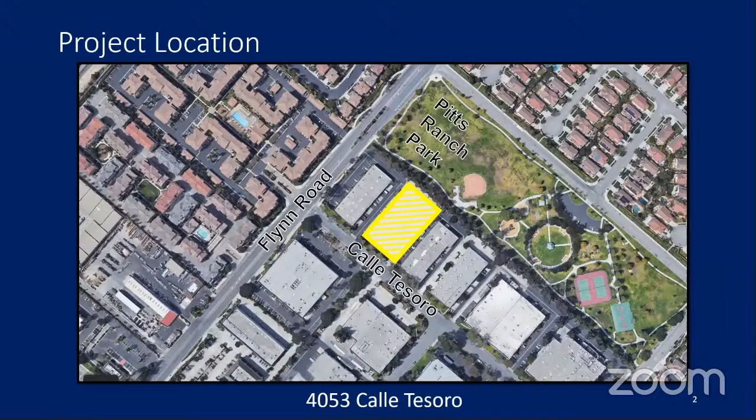The project site is located at 4053 Calle Tesoro, adjacent to Pitts Ranch Park, off of Flynn Road. The request is for approval of a conditional use permit to establish a new stealth wireless communications facility in an industrial portion of the city in the M1 zone. The request also is to increase the allowable height in the M1 zone from 40 feet to 45 feet to accommodate the proposed tower that will be the stealth surrounding for the wireless facility.

Under the municipal code, it's the planning commission that's the decision maker for the requested conditional use permit.

You can see in this image, this is the proposed location of the new wireless facility. Right where that black vehicle is in the front of the screen will be where the tower is connected to the existing building. This tower will take up 3 parking spaces in the corner of the lot.

There are currently 50 parking spaces on site. The tower will take away 3 parking spaces, leaving 47 behind. The existing uses in the building that are going to remain will require 37 parking spaces, leaving a surplus of 10 parking spaces for the site.

Here is the site plan that shows where the tower will be located. There will also be a new landscaping finger created next to the tower.

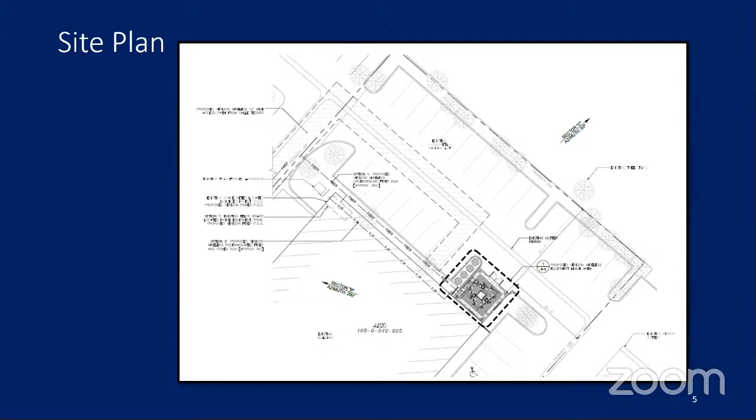Here are some elevations of the proposed tower. It will be using the same colors and materials as the existing building with smooth stucco, precast corrugated concrete. All of the ground mounted equipment will be in the base of the tower, which will be completely enclosed. There is some relief in the height of the tower with an additional roof element. The roof will be Spanish S tile, and there is some decorative venting at the top.

As you can see on the elevations, the top of the antennas are proposed to be at 40 feet, which is the maximum height in the M1 zone. However, there is a proposal to increase the height to 45 feet to accommodate the roof element on top of the tower.

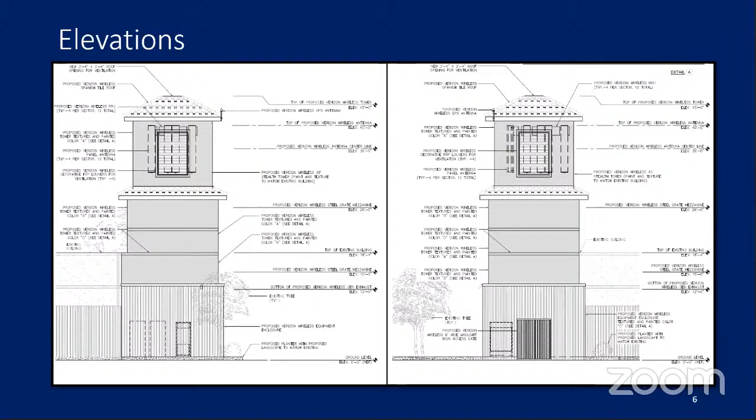Here you can see some photo simulations of what the tower will look like on the building. The picture on the top right is a view from Calle Tesoro, where you'll be seeing the tower most easily from the street at the back of the building.

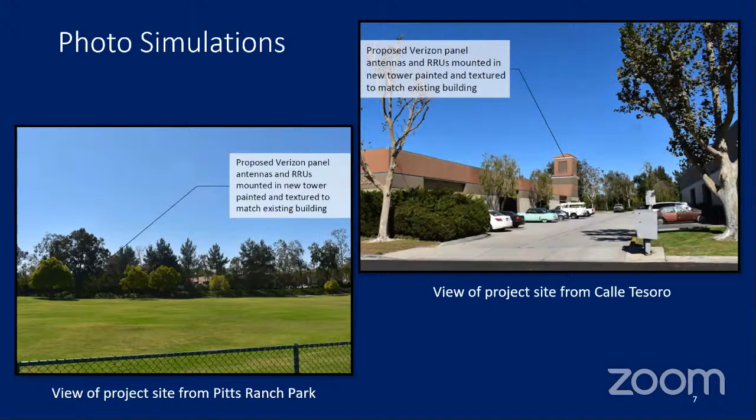The project was reviewed in accordance with CEQA, and it was determined to be a Class 32 infill exemption.

There were some special conditions added to this project. The Municipal Code Chapter 1976 on wireless telecommunications facilities specifies that there are some special conditions to be included on all wireless facility conditional use permits. I'll briefly summarize what those are.

The applicant must submit a radio frequency report for a third-party review within 60 days of commencement of the operations of the facility. All wireless communications facilities must comply with all standards and regulations of the FCC. A site must be maintained in a neat and orderly manner. The facility must comply with the noise ordinance.

The applicant must notify the city within 10 days if their license is revoked. Applicant must remove the facility if it's not in use within 180 days, and the applicant must notify the city if there is a transfer of ownership.

Staff is recommending approval of CUP 387, subject to the conditions of approval. The action of the Planning Commission is final unless an appeal is filed within 10 days of the date of their action. That concludes staff's report. If there's any questions, I'd be happy to answer them.

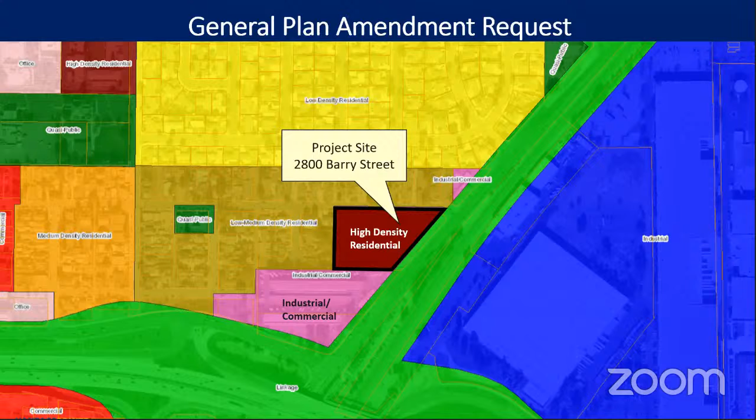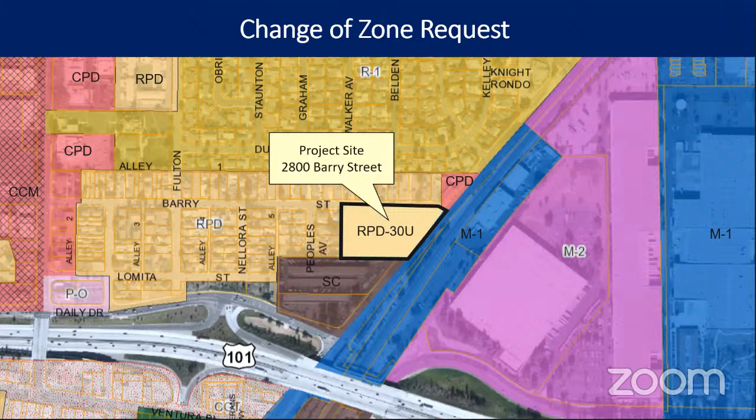The requested general plan amendment and zone change will allow the development of a 68 unit affordable housing development submitted under RPD 205, conditional use permit 405, and tentative tract map 6017.

RPD 205 proposes to construct a 68 unit affordable housing project consisting of 59 affordable rental units restricted to extremely low income, very low income, and low income households, and 1 unrestricted manager's rental unit, and 8 affordable for sale condominium units restricted to low income households.

The development would provide a density of 27 units per acre, which would be consistent with the high density residential general plan land use designation and the proposed RPD 30U zone.

Conditional use permit 405 is a request to provide 7 single room occupancy units, or SROs for short, out of the 60 apartment units within RPD 205.

A single room occupancy unit is a small unit between 300 to 450 square feet with its own kitchen and bathroom, and is rented on a monthly basis or longer.

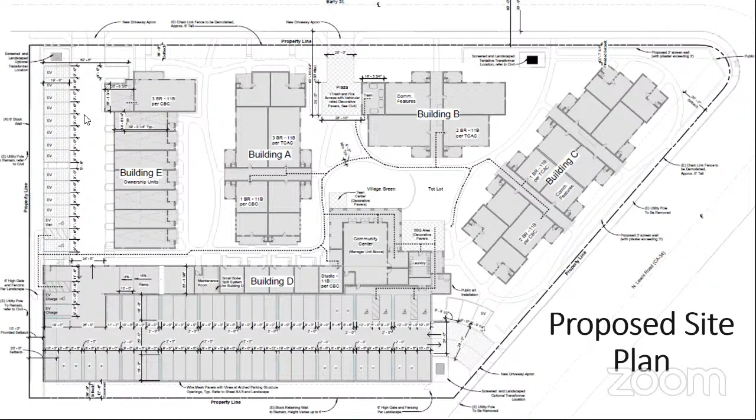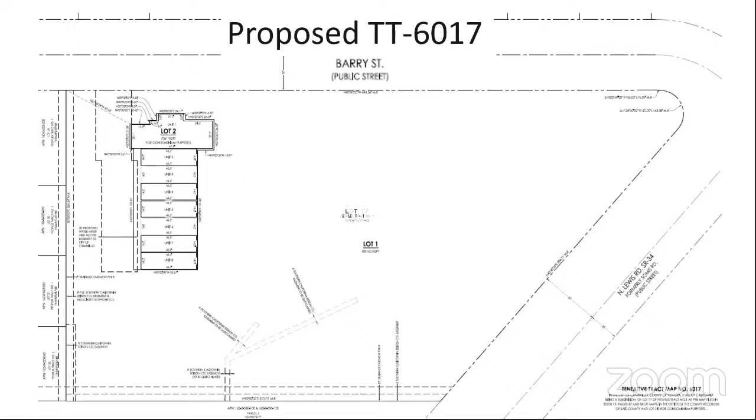The project also proposes 8 for-sale units, all of which will be 3-bedroom units restricted to low-income households.

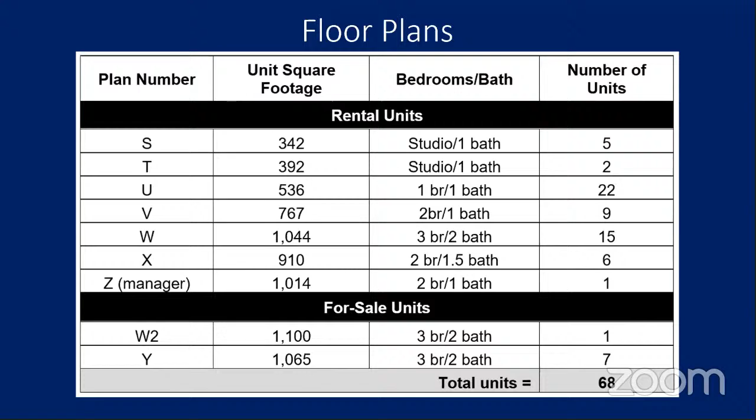The project would also provide 2 different for-sale unit plans. One of those is a 1,100 square foot single story accessible unit, and then the remaining 7 for-sale units are 1,065 square feet to 2.5-story townhome units.

Based on the city's requirements, a minimum of 149 parking spaces are required, and the project is proposing to provide 151 spaces. Each of the for-sale units will have its own 2-car garage attached to the unit.

All of the proposed buildings have been designed in a Spanish colonial style of architecture, consistent with the community design element and heritage zone design guidelines. The building design incorporates architectural elements such as stucco finish, concrete S-tile roof, decorative metal accents, cornices, corbels, tile awnings, and recessed windows. The main body of the residential buildings will be white in color with dark brown trim and black metal accents. The maximum building height allowed in the RPD zone is 25 feet, unless a greater height is approved under the RPD permit.

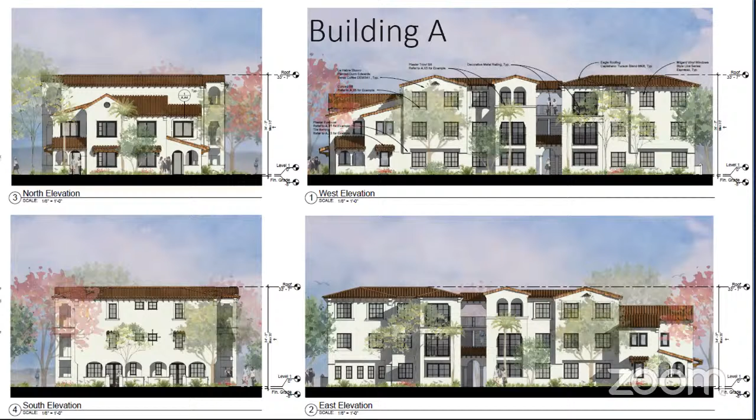Building B is an apartment building, and that also will have a transition from 2-story massing along Barry Street to 3 stories further away from the street. The north elevation, which is on the top left, shows the facade that would be facing Barry Street.

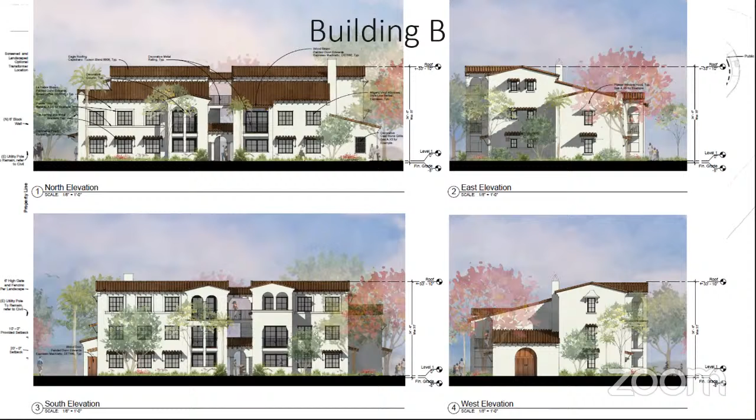Next is Building C, which is at the corner of Barry and Lewis. Building C goes up to 3 stories in the middle and then drops down to 2 stories at both ends. Also, to break up the massing, the building has openings at the stairwells, which allows for access to light and ventilation.

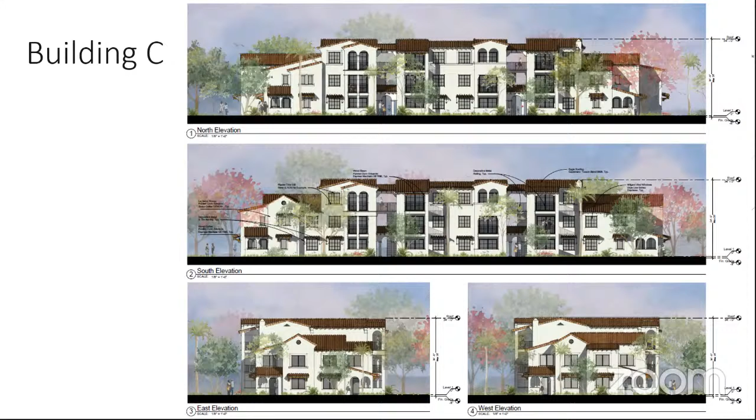Building D, which is located along the southerly edge of the property, includes 5 of the studio units, a manager's unit, laundry room, and community center attached to a 2-level parking structure. The top of the parking structure is approximately 12 foot 4 inches tall and will have solar canopies on top of the 2nd level. The building is highlighted by a tower feature and will include an art feature on the stairwell on the east elevation.

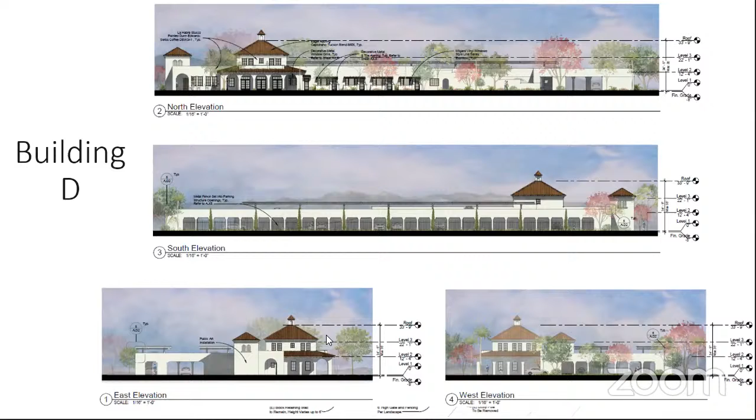The for-sale units in Building E, which is on the westerly side of the property, provide a 1-story unit at the end of the building on the north elevation facing Barry Street, and then transition to a 2.5-story building for the remaining 7 townhomes. The 7 townhomes have tandem garages on the ground floor, living area on the 2nd floor, and habitable attic space on the 1/2-story above.

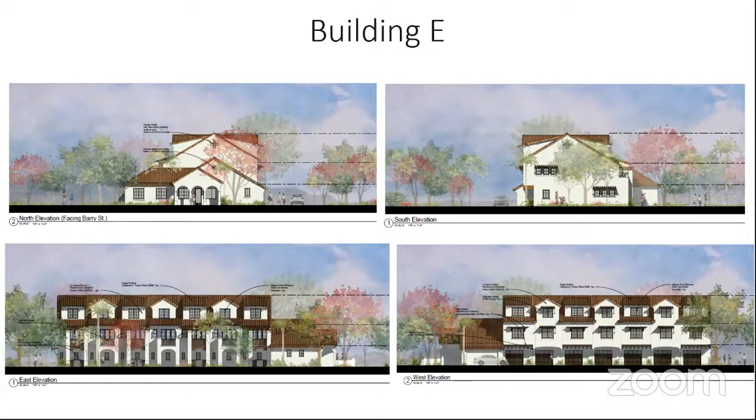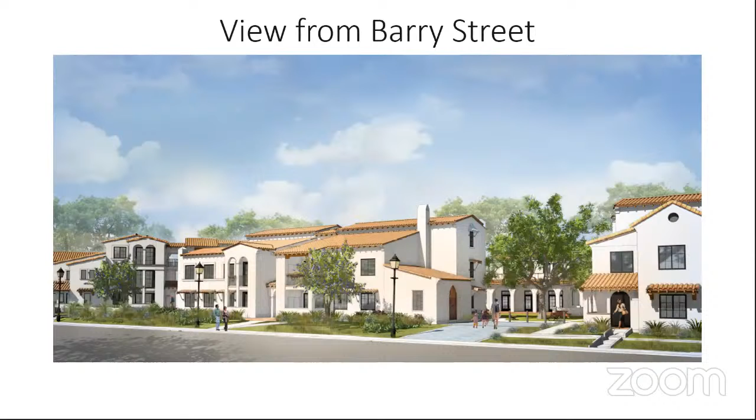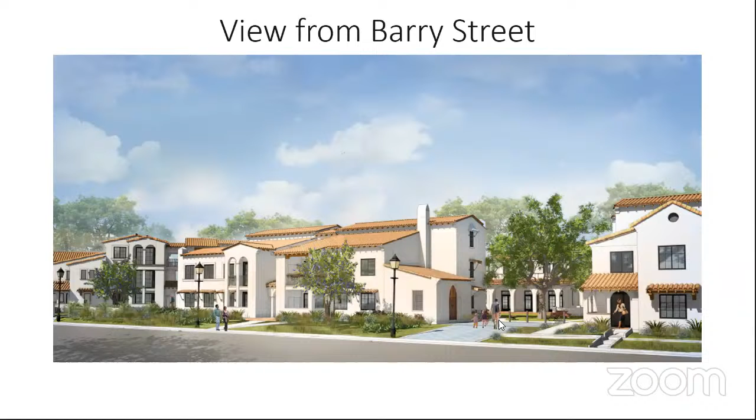This is the view from Barry Street, which shows the massing facing the street is at 2 stories, then goes up to 3 stories within the interior of the project. This also shows the plaza area that will also serve as trash and fire access.

In accordance with the state density bonus law and municipal code chapter 19.49, the applicant is requesting concessions to allow for compact parking spaces in the parking structure and tandem compact parking spaces within the private garages for the for-sale units. They're also asking for a reduction in the required common open space from 48,875 square feet to approximately 30,538 square feet, and a reduction in the rear yard setback from 20 feet to 10 feet from the parking structure to the westerly property line. The project complies with all other development standards.

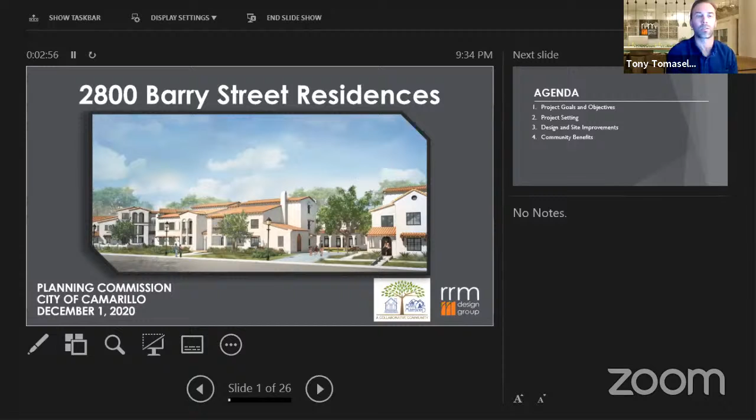First, as we get started, I'll touch on some project goals and objectives that we set forth as we were approaching this project, discuss the project setting and context, go through the design and site improvements in a bit more detail and highlight a few things that I think are important to consider, as well as talk about some of the community benefits.

In terms of project goals and objectives, really our primary goal for this project was to create new, really high quality, affordable housing opportunities and a really wide and diverse mix of housing types for people with varying housing needs.

We really wanted to activate what we see as a bit of a blighted or underutilized lot in a very prominent location in the city, improve pedestrian connections in the neighborhood, implement really cutting edge green building, innovative green building strategies, including solar and other energy and water conservation features, which I'll touch on a little bit more.

Achieve the goals of the city's general plan and the city's vision for this site. They've been a really active partner in this, as you know, through the purchase of the site. And ultimately to create a really valuable and thriving community asset that we can all be proud of at the end of the day.

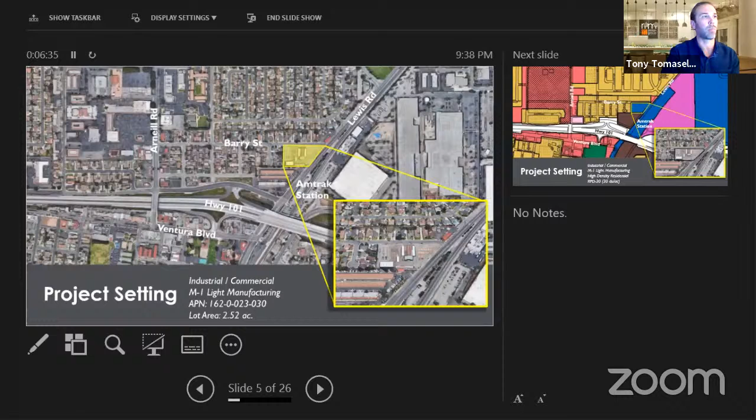It's there at the corner of Barry Street and Lewis Road, as you know, catty corner to the Amtrak station, close proximity to Old Town Camarillo along Ventura Boulevard, as well as the commercial uses along Arneill Road. The site is about a 2.5 acre site, and it's currently zoned for light manufacturing. And it was the previous stock lumber yard location.

This is the zoning map. As you can see, we are requesting the general plan amendment to high density residential and the change of zone to RPD 30, which is consistent with the city's goals within the RFP for the site.

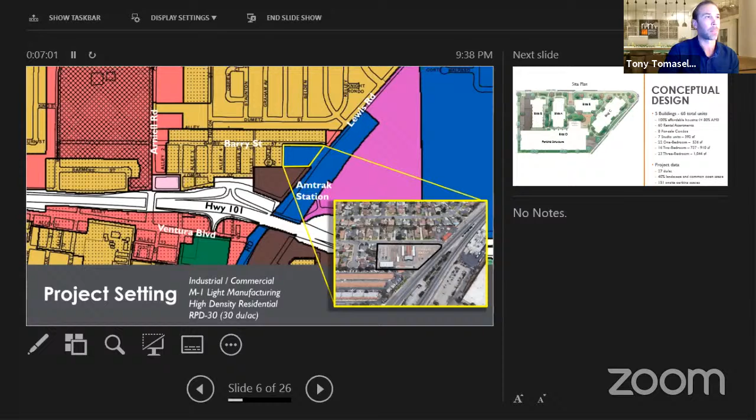And then as we dive into the site plan, one of the things that was really important to us as we started to approach the design is that Barry Street is a residential neighborhood. And so we really wanted to have a really compatible and consistent residential street frontage. So as you'll see in our elevations, each of those buildings that faces Barry Street sort of steps down to either a 1 or a 2-story building massing, just to kind of keep a similar rhythm of development as you would go down the street.

Another thing that was really important is we wanted to create a lot of outdoor space. This project has 40% landscape and common open space by site area, and I'll talk about a little bit more of the common open space amenities in just a moment.

But in order to create that really pleasant pedestrian experience as you're walking, not only through this project, but also on the surrounding streets, is to consolidate that parking into a parking structure along the south side of the site, which is adjacent to the mini storage. And so that was kind of our overarching approach for how we tackled the site design.

In terms of the program, it's again 100% affordable housing for households earning less than 80% of the area median income. There's 60 rental apartments within buildings A, B, C, and D, and 8 for-sale condos, which is within building E.

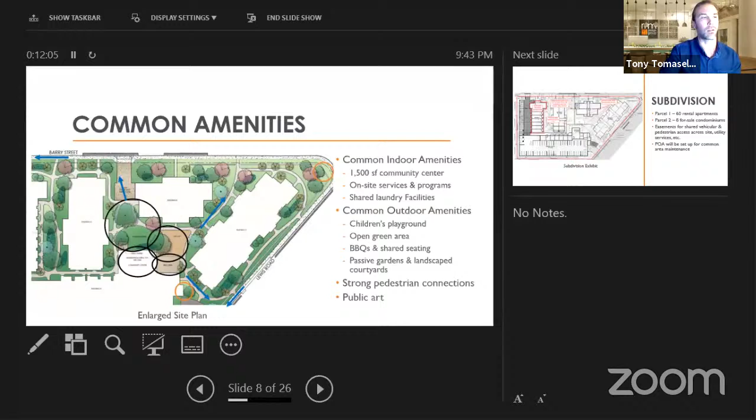And then lastly, because this is a really great gateway site and a prominent location, we wanted to include areas for public art that can announce it and create a really great asset for the community. Those haven't been designed yet, but as we get further into the process, we will likely be working with the city, resident services, and potentially tenants, creating public art pieces that incorporate the tenants, maybe the kids of the area, that can all contribute to those pieces.

We do include a subdivision, and I wanted to clarify why that's necessary. It's a bit of a formality for us, but essentially in order to provide the for-sale condominiums, those needed to be on a separate parcel, so that parcel can individually be condominiumized through the State Department of Real Estate. They'll also finance separately, which was a consideration for the affordable rental housing, which will be on lot 1, which is everything except building E. That will obtain state and local grants, tax credit financing, and the like.

We will be providing easements for shared vehicular and pedestrian access across the site, utility services, etc. And then a property owners association will be set up so that all the common area will be managed by the property manager or the property owners association. There'll be agreements to ensure that occurs.

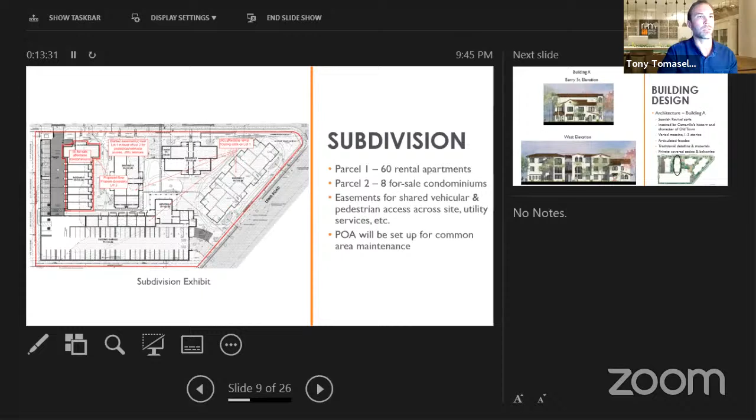In terms of the building design, as Jackie had mentioned earlier, I think it's important to recap. The buildings will be Spanish revival or colonial style, really inspired by Camarillo's history and the character of Old Town, and consistent with the Heritage Zone design requirements. We really wanted to focus on providing a real variety of massing between 1- and 3-story elements, so we can articulate these facades and provide a lot of traditional detailing and materials. All of the units have private covered patios and balconies, which also adds a lot of nuance and interest to the massing of the buildings, so they don't look all the same or all boxy.

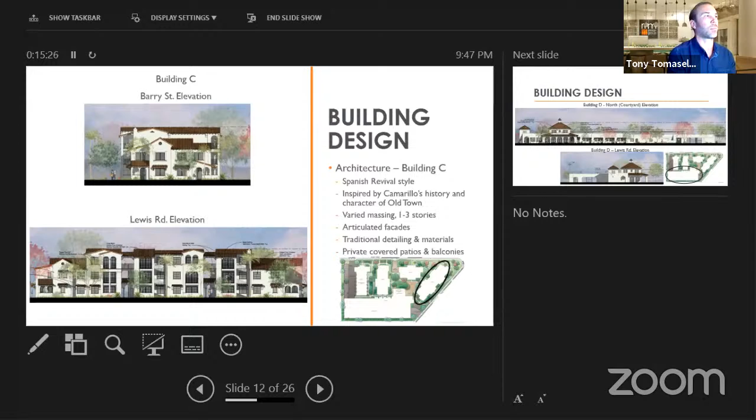Similarly with building C, this is a kind of a unique building in that its access is on a diagonal, reaching out toward that intersection of Barry Street and Lewis. Again, dropping down to 2 stories on both ends.

Building D is the parking structure building, and it's also the building where we'll have the indoor community center and the manager's unit, which would be right above. Because it sort of is the centerpiece for this more active communal open space in the center of the site, we saw this as a real nice focal point to anchor the entire project, especially the more communal aspects of it.

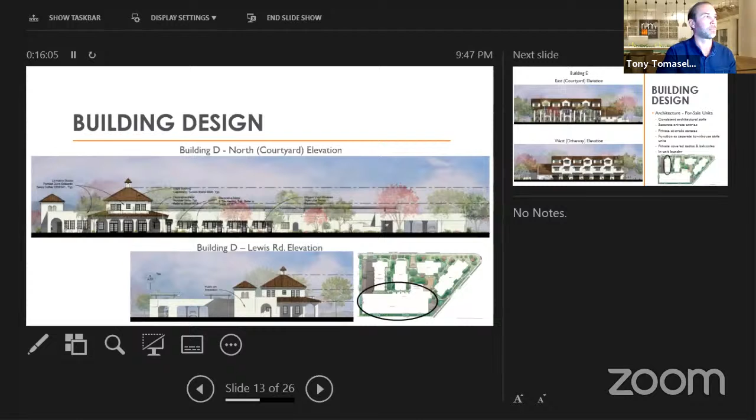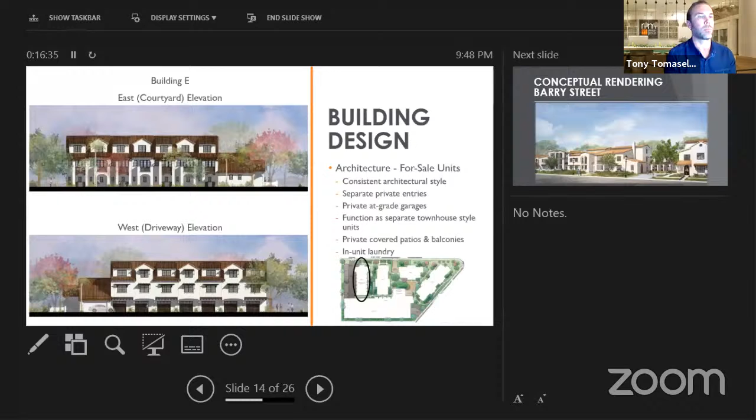And then lastly, building E, the for-sale units. Again, it's a very consistent architectural style, though it has kind of a look and feel unto its own. Each of these units will have a private separate entry, private at-grade garages. These will function as separate townhomes, although they are condominiums. Each will have private covered patios and balconies, as well as in-unit laundry.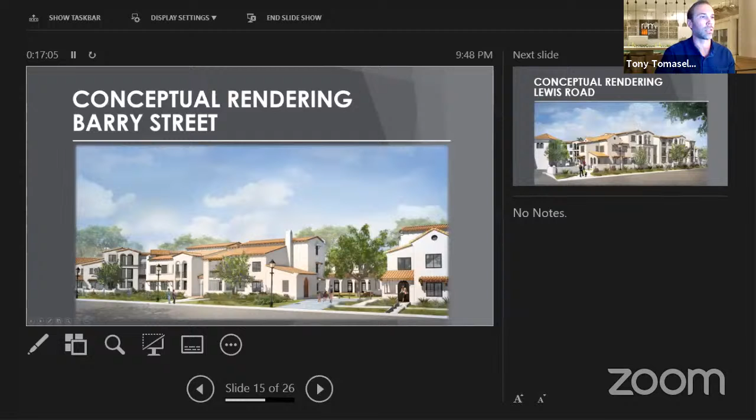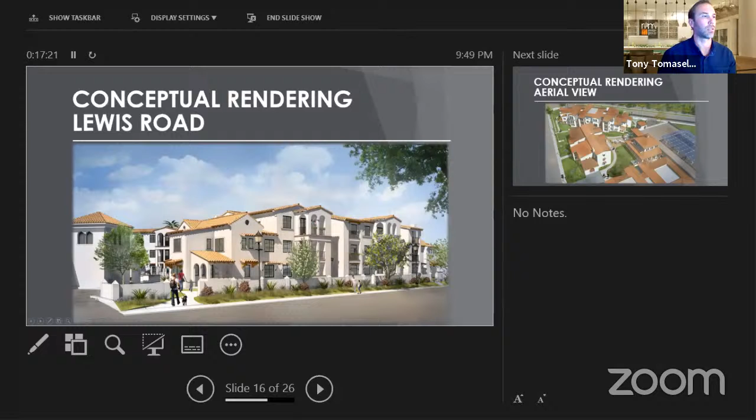And then sort of that large, more heritage tree there in the center. This is the view of Lewis Road, where you can see that driveway entry into the parking structure, as well as the public improvements along Lewis Road, the sidewalk parkway.

And then an aerial view where you can start to get a sense of how the buildings come together, integrate, and how these interstitial spaces might look and feel as well.

There was a question about the solar panels here. Basically, we have not done all of the engineering on these yet, and it can vary. We will be bringing in a photovoltaic consultant to help with the design and engineering of that system. But based on the square footage that we've allowed for, we anticipate that basically all of the electricity for the common areas would be provided for, and then some. We don't know where that exactly lies, but that's something we'll be looking at as we continue forward.

There was also a question about security in the parking structure. One thing that Many Mansions and the Housing Authority typically do on their projects, and I believe it's also a condition of approval, is to provide some security cameras throughout the site, and the parking structure would certainly be an area that we would include some of those as well.

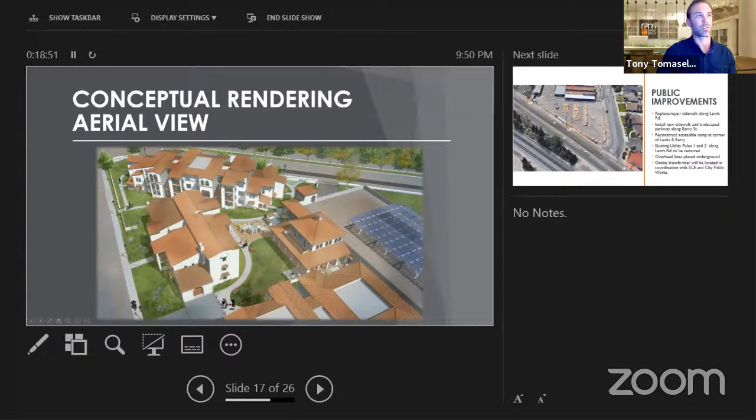There were a few questions about public improvements and undergrounding, which I wanted to take a few minutes and provide some clarification on. So these, again, are the public improvements along Lewis Road. We'll be repairing the sidewalk there, installing a new sidewalk where one doesn't currently exist, as well as the landscape parkway on Barry Street, and reconstructing the accessible ramp at the corner of Lewis and Barry Street.

And then the undergrounding along Lewis Road — essentially what we understand, or what we're anticipating, is that we will take it underground from this pole along this Lewis Road stretch, thereby removing the overhead wires and poles from that frontage. That will be done in coordination with SoCal Edison, as well as the placement of our ultimate on-site transformer.

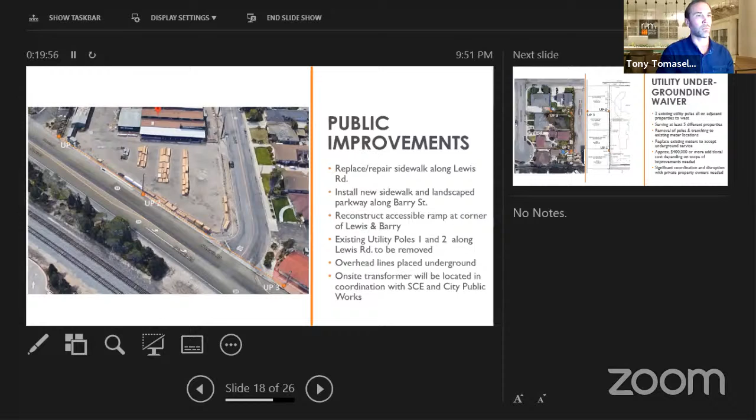Regarding the utility undergrounding waiver that we are requesting, it did come up, and I think the question was answered, but just to clarify again: there are 3 existing utility poles on the adjacent property to the west of ours. As you can see here, I've highlighted the property line, and these poles are just immediately adjacent to that on the adjacent properties.

These poles serve what we understand is at least 5 properties, and undergrounding those poles and overhead wires would require removal of the poles, trenching for the overhead lines, and also trenching through these private properties to the existing meter locations, then replacing those meters to accept underground service. Just the scale and magnitude of doing that, and also coordinating with those property owners, would we believe be a logistical challenge, if not infeasible, and would add significant cost and time that wasn't anticipated and isn't really needed to accommodate this project.

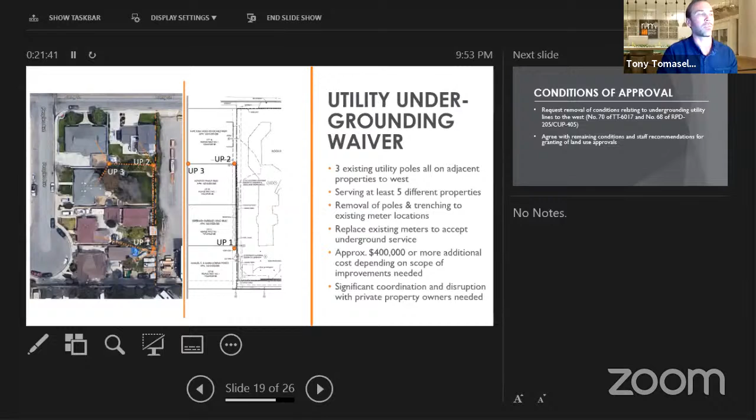Other than that, we agree with the remaining conditions and the staff recommendations for the granting of the land use approvals. And we are very excited about this project. Me personally, I'm born and raised in Camarillo, and this project is close to me, and I'm excited to be a part of the team on this.

I do believe it improves a vacant lot in a prominent location along Lewis Road. There's a strong, diverse mix of new affordable and high quality housing opportunities as part of this project. It's consistent with the city's general plan and the city's vision and affordable housing goals for the site. The design is compatible and sensitive to the adjacent neighborhood and uses. And this development team is a very well-known local partnership with an amazing track record of providing great affordable housing projects in our community.

So with that, I hope I got to all your questions. I'm sure there are still a few lingering out there. If there's anything else I can help answer, please feel free to ask. Thank you again.

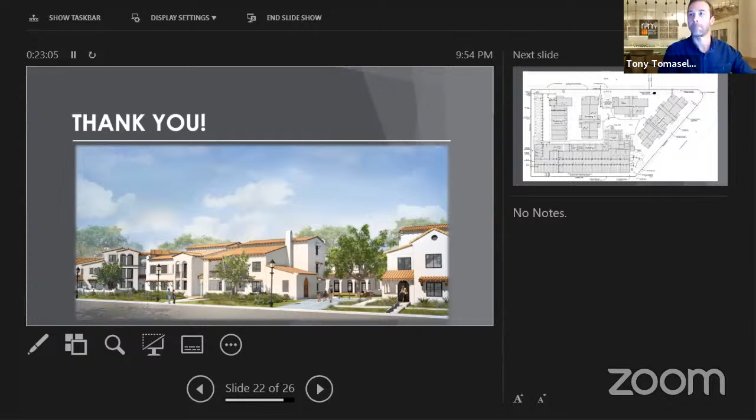Thank you, Mr. Tomasello. This is Joe Vacca. I just wanted to share, I think there was a question. Did you cover the fact that they're walk-up buildings without elevators? These are non-elevated buildings with the exception of the parking structure.

However, as part of the tax credit funding requirements, as well as the goals and desires of the development team, essentially all of the ground floor units throughout the project will be accessible or adaptable, as they call it.

Thank you. And can you speak for a moment about the height? I know the front setback off of Lewis Road is fairly significant, treated like a well-landscaped buffer area adjacent to Lewis Road. And the wall heights out there, I think, are more traditional for what we've experienced at Village at the Park, for example, with about a 3.5 foot tall wall.

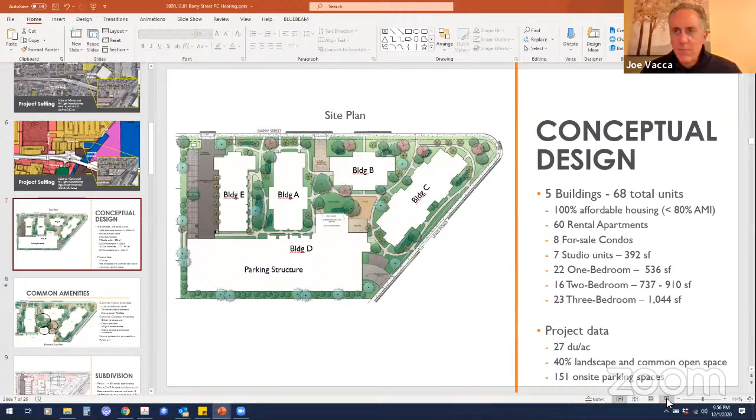But can you talk about that a moment? Yeah, that's right. The goal for Lewis Road was to create a more pleasant pedestrian experience. Although it's a more trafficked road at this point, we anticipate there would eventually be some connections, maybe underneath the overpass and elsewhere as it continued on. So in our opinion, as architects and planners, we think it would be a shame for there to be a higher wall that would really separate this project, or any project, from that streetscape.

In terms of noise and some of those nuisances, as was stated previously, the city does have requirements for noise attenuation. We'll be obtaining an acoustical study that'll give us recommendations. Typically what we see is that not only do the walls of the building significantly attenuate sound, but if any additional attenuation is needed to meet those requirements, you'd go to a dual glaze window, or even triple glaze in certain cases. But from our understanding of the noise levels out there, we don't anticipate that would necessarily be required.

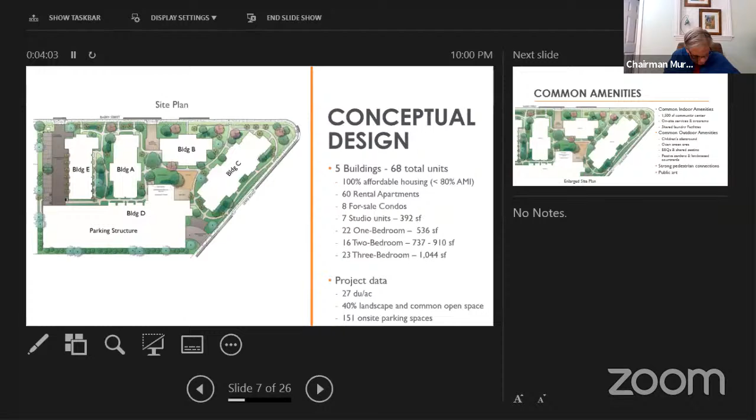All right, Tony, thank you very much for that presentation. That was very thorough, much appreciated. And I like the way you incorporated answers to a number of our previous questions for staff into your presentation. So I'd like to open it up to commissioner questions for the applicant, and remind that Mr. Michael Nye with the AHA is also present, and I think it was mentioned that Habitat for Humanity and Many Mansions representatives are also here this evening. So why don't we go ahead and open it up for questions for any of those applicant representatives at this time?

Any questions? Okay, we have one from Commissioner Vandermeulen. Just one that didn't get answered or talked about, and that was secure bicycle racks. So parking, if they anticipate that not everybody will be driving, is there any space in the garage for bicycle racks?

Chair Murphy, Commissioner Vandermeulen, thank you again for reminding me of that. I did want to touch on that as well. There aren't any required bicycle parking for this zone, but it is something that is important to us, and we are anticipating including it, although we're not showing it currently. We provided some space within the parking structure, and then we anticipate having some secured bike racks in locations immediately adjacent to the building, so they can be in closer proximity to each of the various buildings, rather than just in one large centralized location in the parking structure.